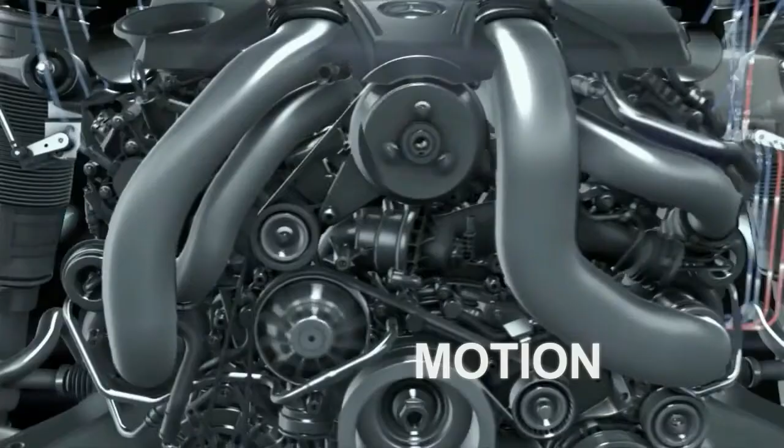Life is motion. Motion is impossible without friction. How can we solve the problems caused by friction? That is the question.

Kragelsky Institute of Tribology presents the most effective and, at this moment, the most universal toolkit for solving the tribological problems of technical progress: the new automated complex of tribological researches, Itrib system.

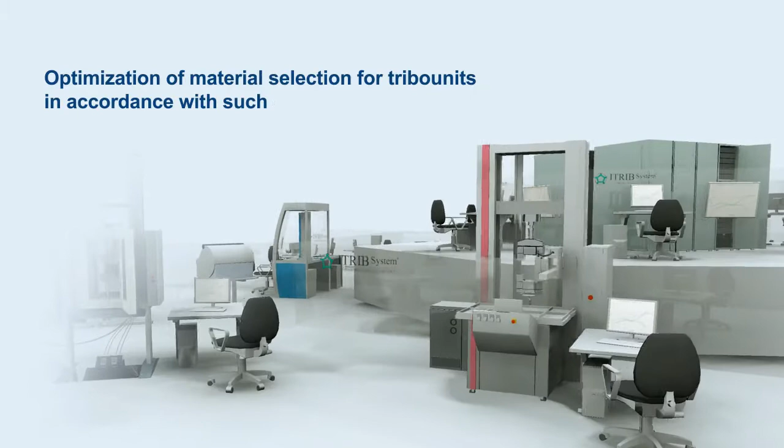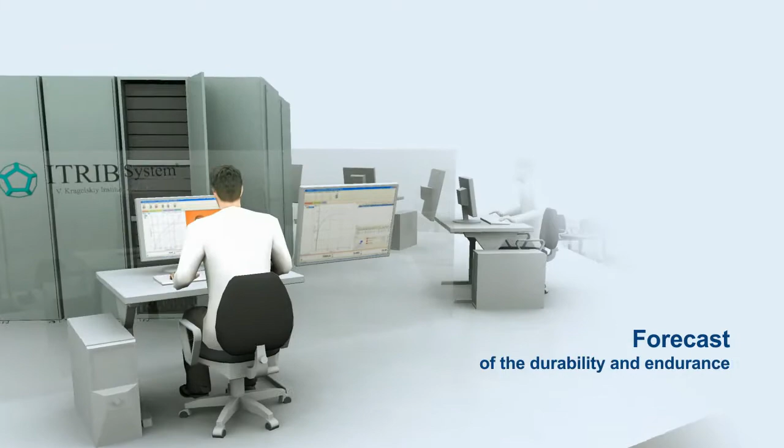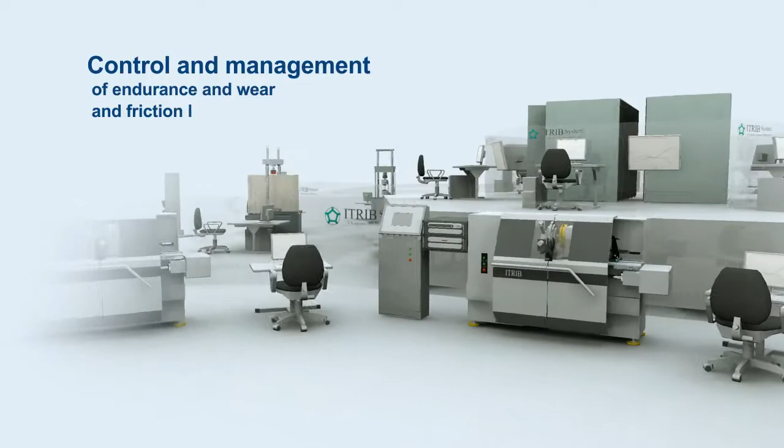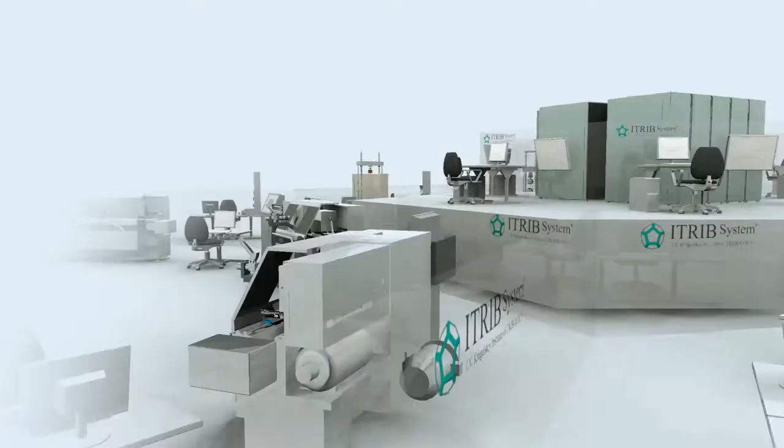Itrib system makes the following possible: optimization of material selection of tribo units in accordance with criteria such as functional purpose and wear resistance of the tribo unit as a whole and of its elements; forecast of the durability and endurance of tribo units; forecast of serviceability and reliability of tribo units; control and management of endurance, wear and friction losses in maintenance; creation of new materials and nanocomposite covers of tribological purpose with set property values; and research of the nature of friction and wear of tribo unit materials.

The complex of tribological researches, Itrib system, is an industrial variant of a new calculation-experimental complex of technical tools and software created for forecasting and controlling friction and wear of frictional knots in tribo systems, and for managing their operational indicators. Itrib system becomes equipment for design and research centers of industrial enterprises, scientific institutions and universities.

Itrib system consists of 5 test modules and the information analytical module.

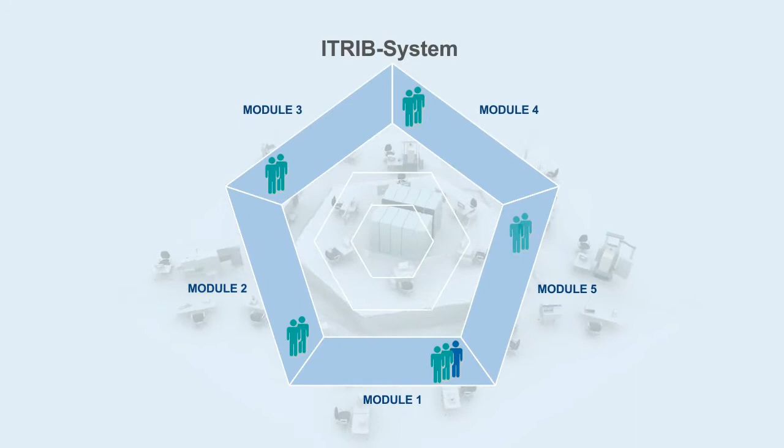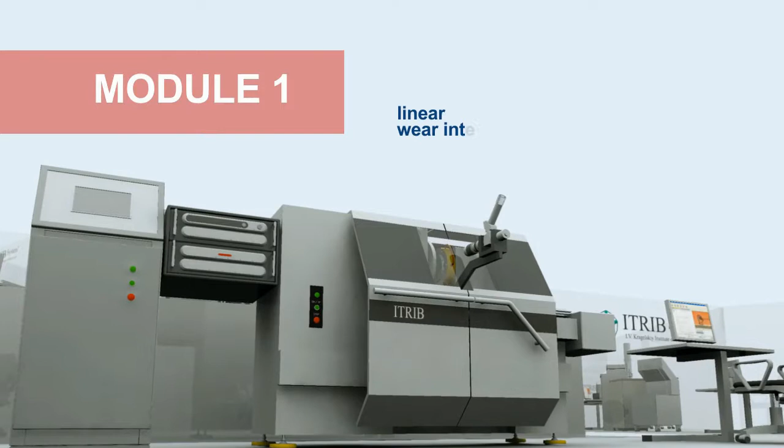Module 1 is focused on tribotechnical tests of friction knots, aiming at obtaining different electrical frictional wear properties of friction couples. For example, friction coefficient, contact electrical resistance, linear wear intensity, and temperature in a friction zone.

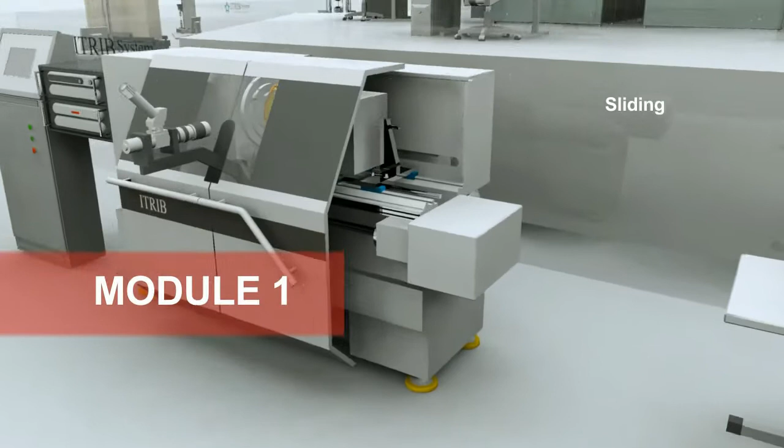In a wide range of electrical frictional interaction modes, it obtains parameters such as sliding speed from 1/1000th to 125 meters per second, mechanical load from 1 to 10,000 Newton, and current from 0 to 500 ampere.

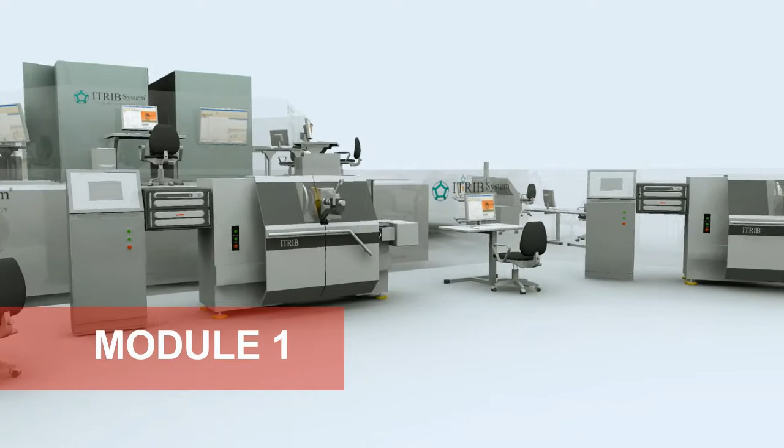Module 1 is equipped with new original tribological testing machines, Itrib Dynamics, with original methods of testing and software. Tribological testing machine Itrib Dynamics can also be used separately with other special methods of testing and software.

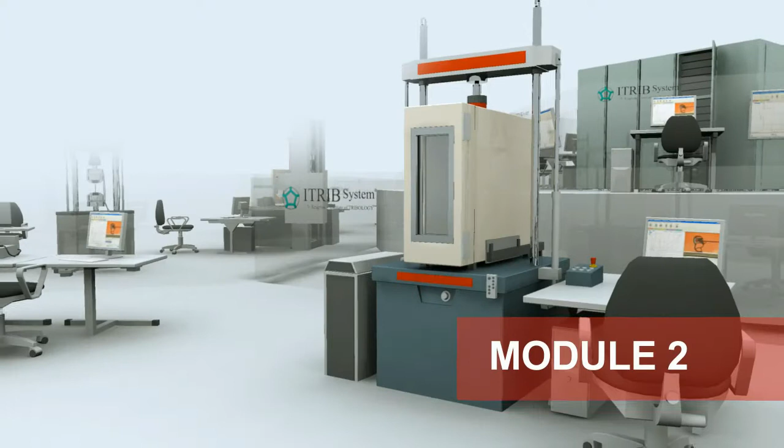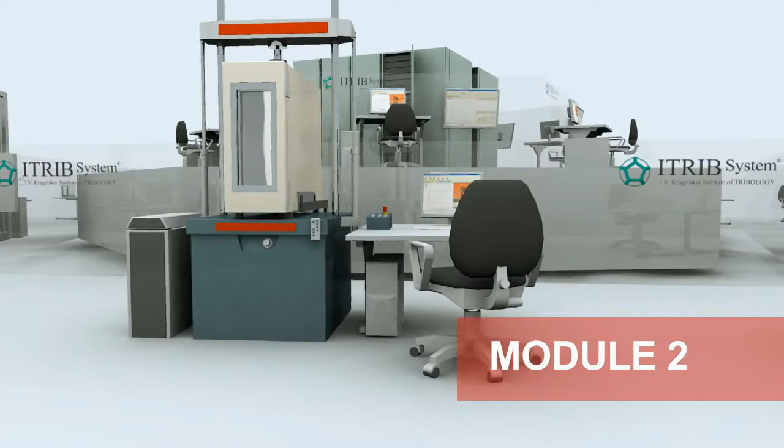Module 2 is focused on testing elastic-plastic parameters of materials as a function of temperature. For example, Rockwell ball hardness, Brinell hardness, plastic hardness, and contact rigidity of the tribo junction. It is equipped with new original universal testing machines, Itrib Contact, with heat chambers, original methods of testing and software.

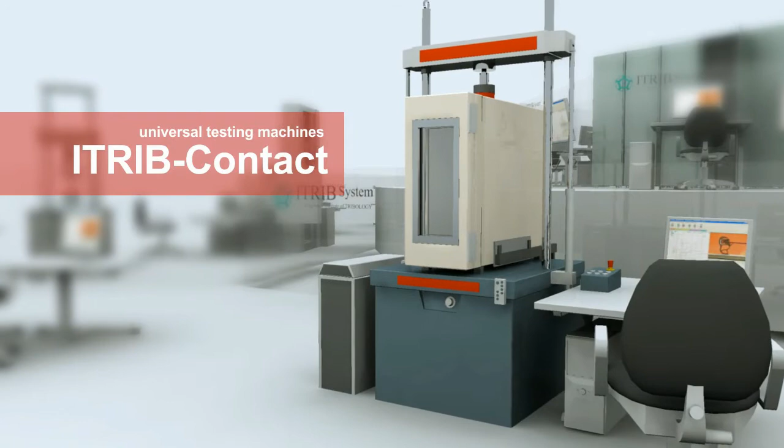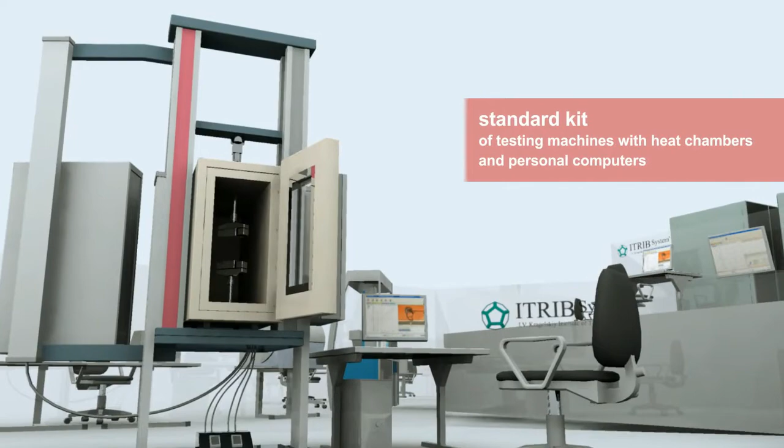Module 3 serves for carrying out tensile and compression tests for ultimate strength and yield strength, to be registered as a function of temperature. It is equipped with a standard kit of testing machines with heat chambers and personal computers.

Module 4 is equipped with standard machinery with a personal computer for researching parameters of roughness of friction surfaces and electrical-physical parameters of materials, with equipment for chemical and structural analysis, and with devices for weight control of the materials being tested.

Module 5 makes it possible to carry out research on thermal parameters of materials as a function of temperature. For example, heat conduction, thermal diffusivity, specific heat, and density. It is equipped with standard machinery with a personal computer.

The information analytical module is the nucleus of the Itrib system complex. It is equipped with a supercomputer. The information from all 5 modules comes here.

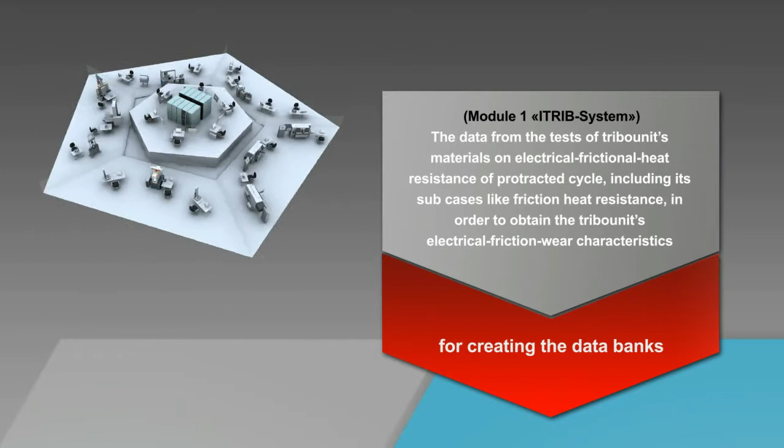From Module 1 comes data from tests of tribo unit materials on electrical frictional heat resistance of protracted cycle, including subcases like friction heat resistance, in order to obtain the tribo unit's electrical friction wear characteristics.

Data from testing the parameters of frictional couple materials come from the other modules for obtaining information on physical-mechanical properties, thermal properties, electrical-physical properties, and geometrical properties of frictional surface quality.

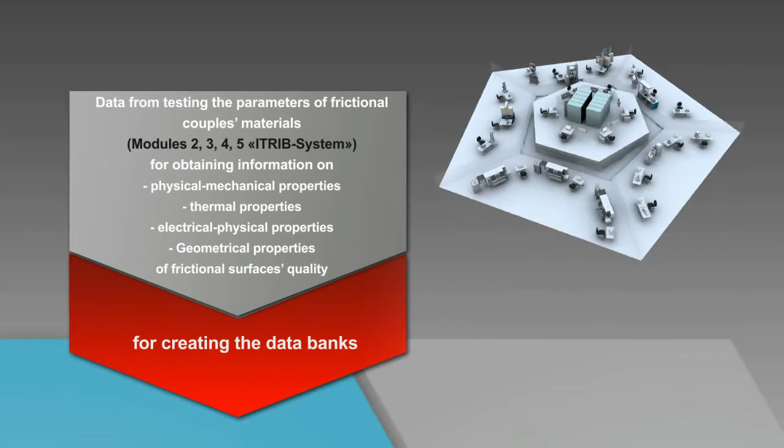Software processes the information from lab testing in modules 1 to 5, creates data banks on material properties, and libraries of electronic tribotechnical information for analytical forecasting of tribotechnical properties of machines' frictional knots, on the basis of generalized thermodynamics of friction and wear of tribo systems.

Software of the information analytical module is elaborated as a system of research and forecasting of operational frictional wear parameters of machines' frictional knots.

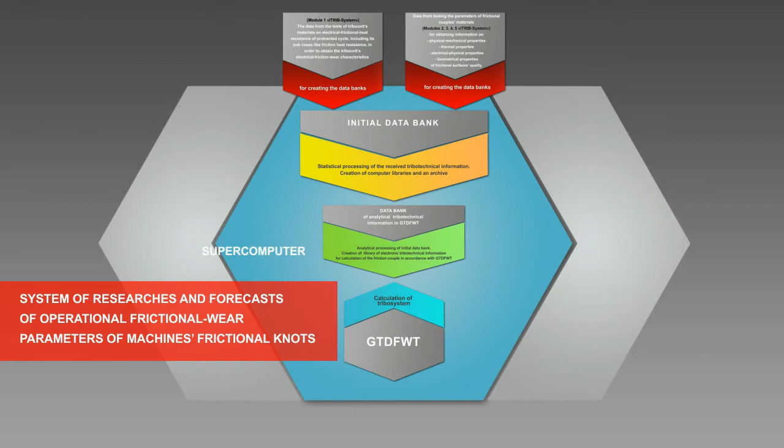Functional capabilities of the system provide for parallel research in 6 directions, in a mode of dialogue between a person and the software of the Itrib system.

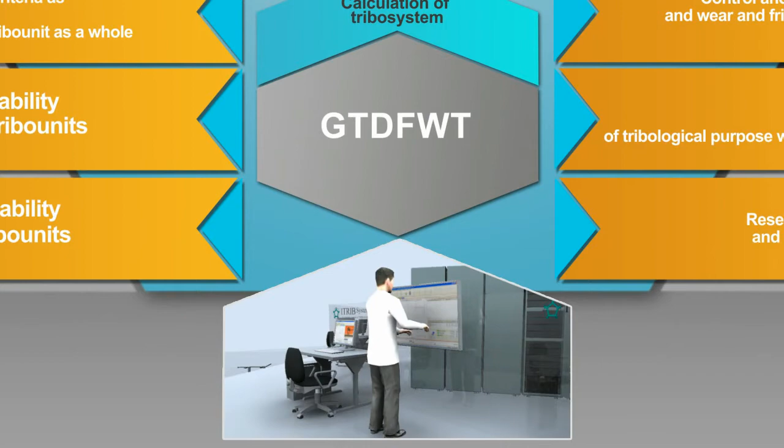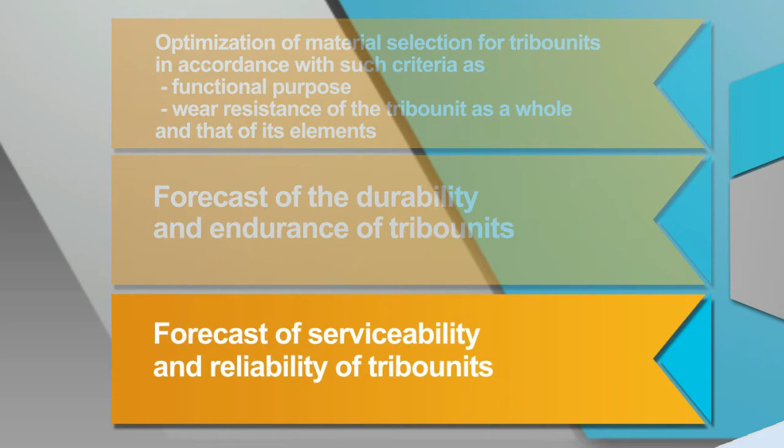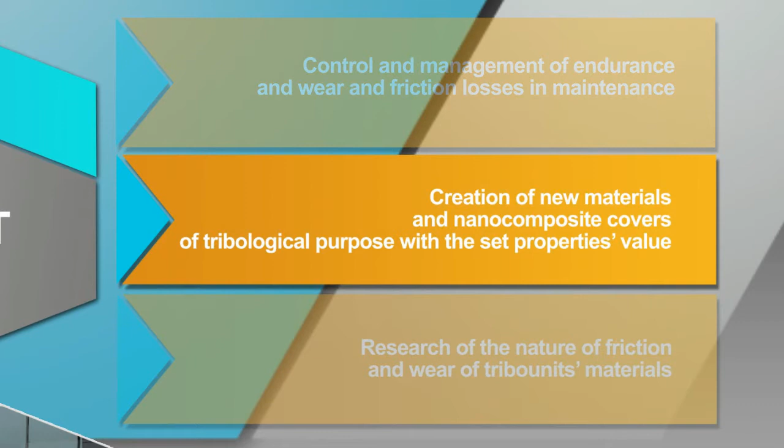These directions are: optimization of material selection of tribo units in accordance with criteria such as functional purpose and wear resistance of the tribo unit as a whole and of its elements; forecast of the durability and endurance of tribo units; forecast of serviceability and reliability of tribo units; control and management of endurance, wear and friction losses in maintenance; creation of new materials and nanocomposite covers of tribological purpose with set property values; and research of the nature of friction and wear of tribo unit materials.

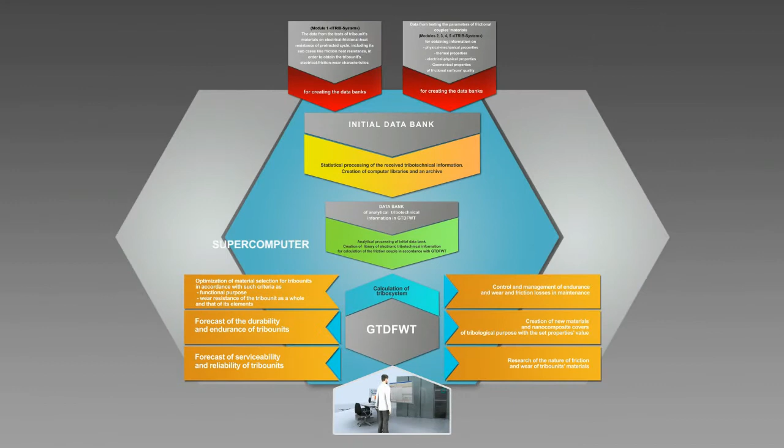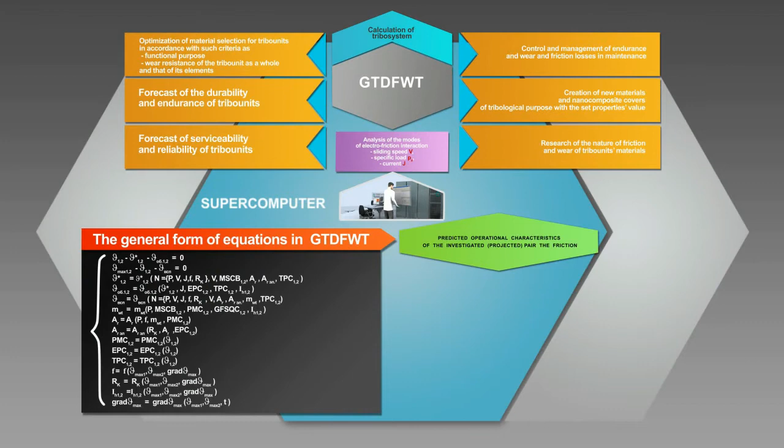The algorithm of calculation of electrical frictional interaction, in accordance with generalized thermodynamics of friction and wear of tribo systems in the software of Itrib system, makes it possible, on the basis of the solution of the generalized thermodynamics set of equations, to obtain general information about operational parameters of a considered friction couple of a real frictional knot for any moment of its work, as a function of friction time.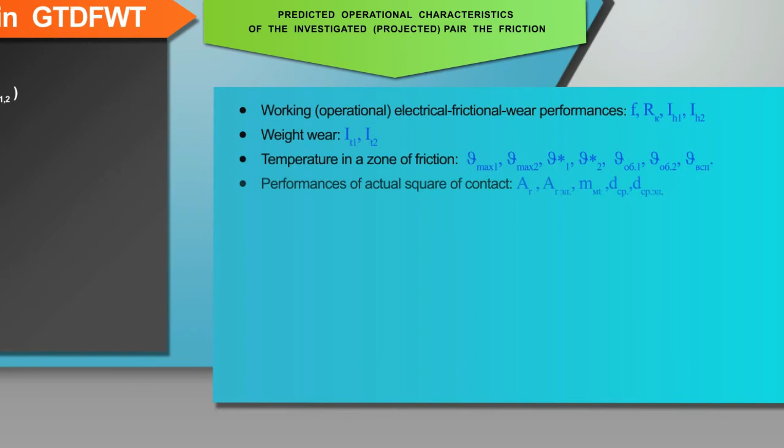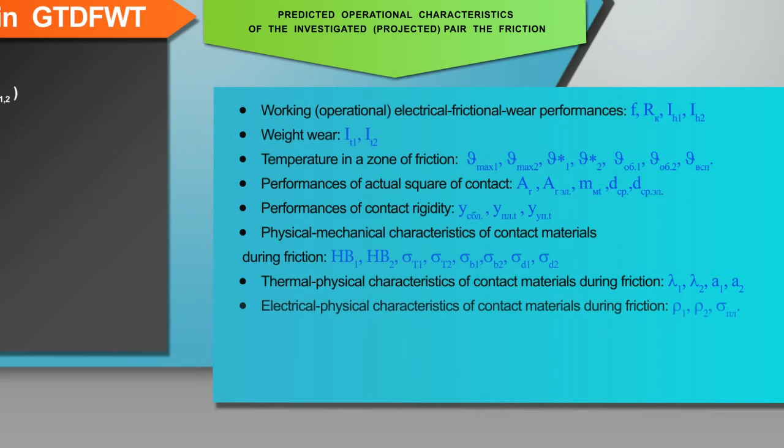This includes working, operational, electrical frictional wear performances: weight wear, temperature in the zone of friction, performances of actual square of contact, performances of contact rigidity, physical-mechanical characteristics of contact materials during friction, thermal physical characteristics of contact materials during friction, and electrical physical characteristics of contact materials during friction.

Of the new automated complex of tribological researches, ITRIB System, at point A of the supercomputer software, a researcher sets one of 6 directions of research.

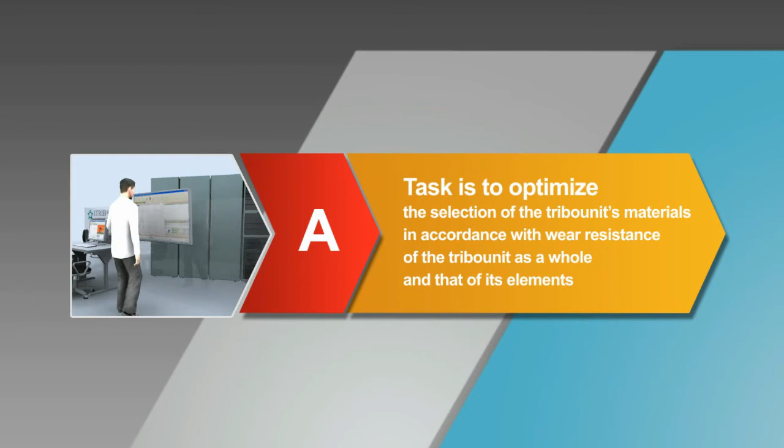For example, at point A, the task is to optimize the selection of tribo unit materials in accordance with wear resistance of the tribo unit as a whole and of its elements.

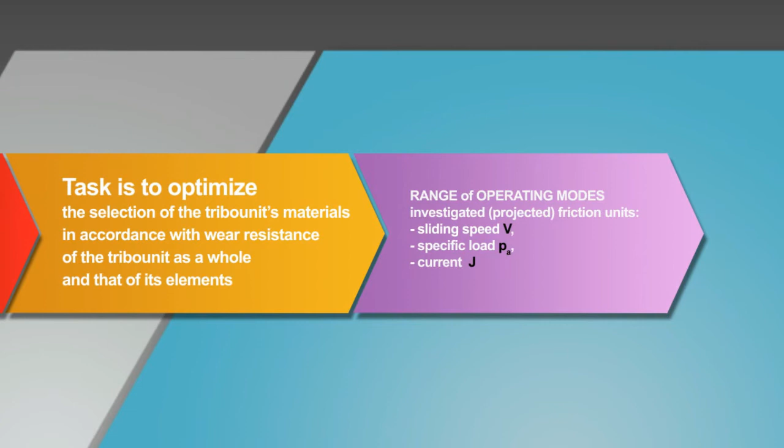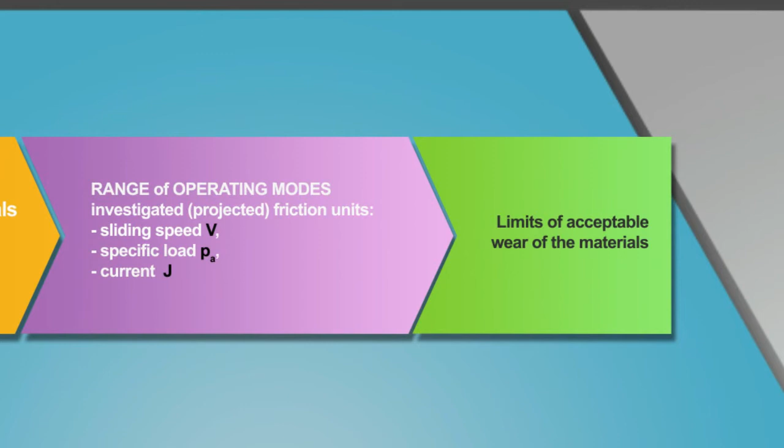The researcher enters the parameters of the working mode of the considered drafted tribo unit, such as sliding speed, specific load, current (if for electrical contacts), and limits of acceptable wear of the materials, then commands the computer to activate the program.

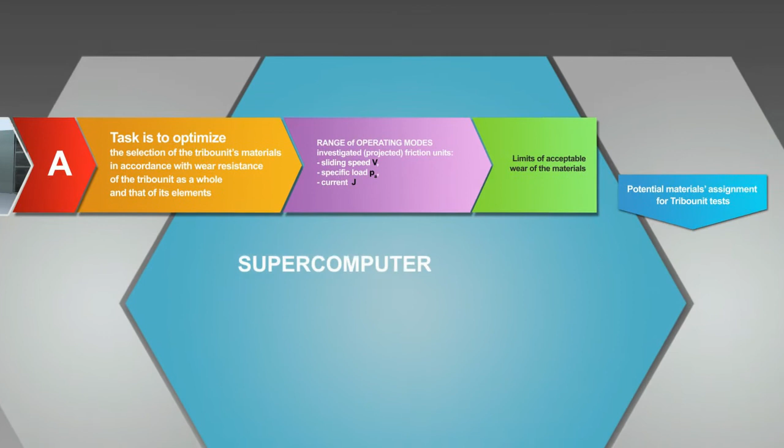Further work is carried out by the computer with its software. It analyzes the library of electronic tribotechnical information, and sets the task for testing modules for additional research in case there is no necessary data in the library.

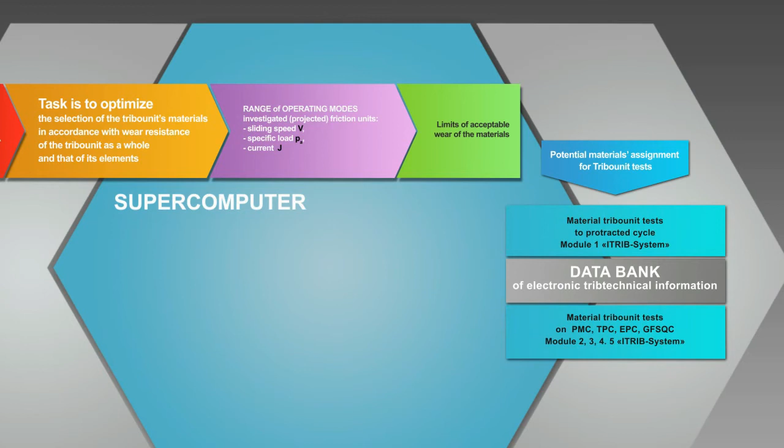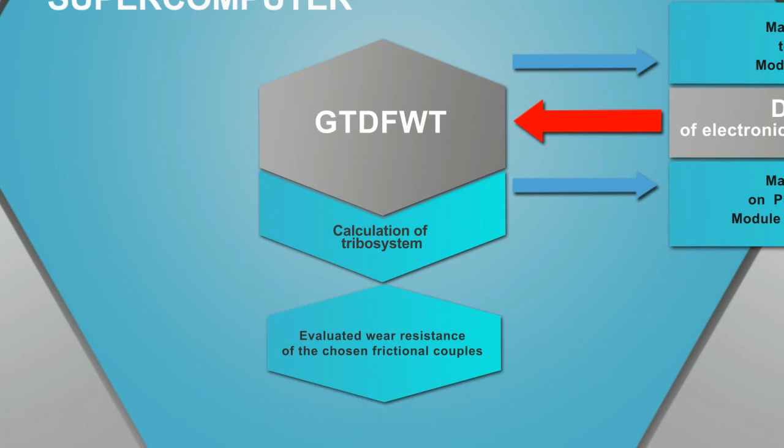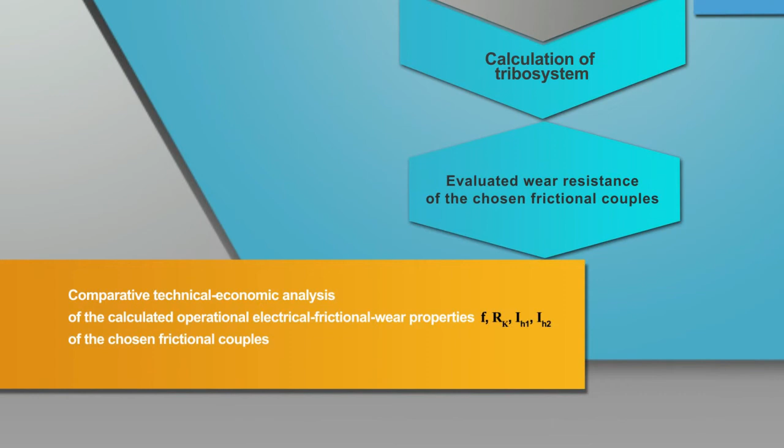It calculates in accordance with generalized thermodynamics of friction and wear of tribo systems, evaluates wear resistance of the chosen frictional couples, and carries out comparative technical-economic analysis of the calculated operational electrical frictional wear properties of the chosen frictional couples.

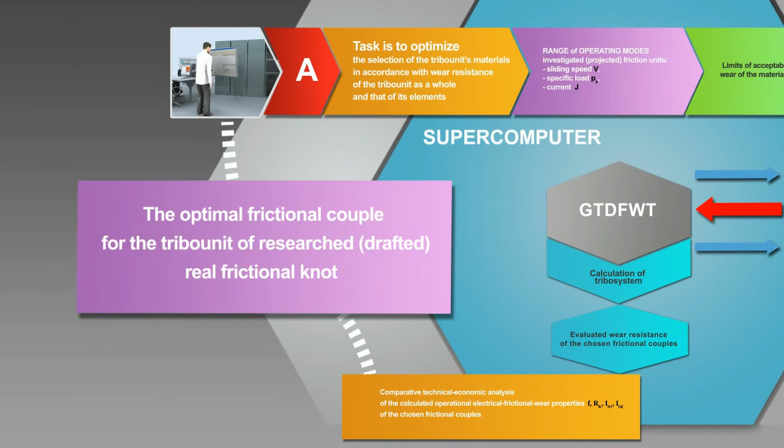It offers the researcher the optimal frictional couple for the tribo unit of the researched, drafted, real frictional knot, or offers modes of task correction in case a solution is not found.

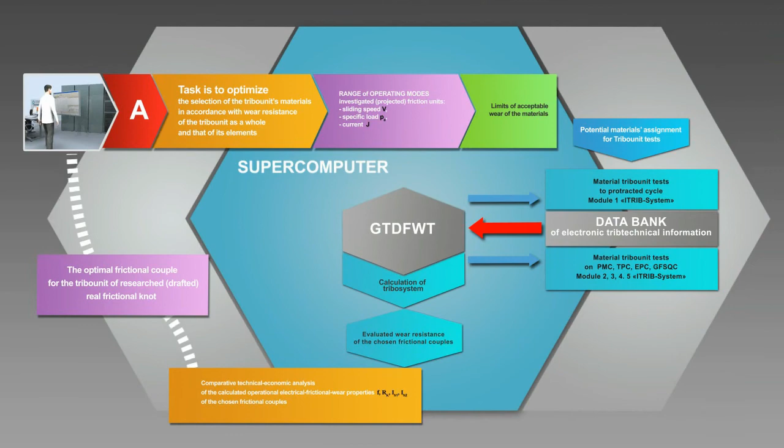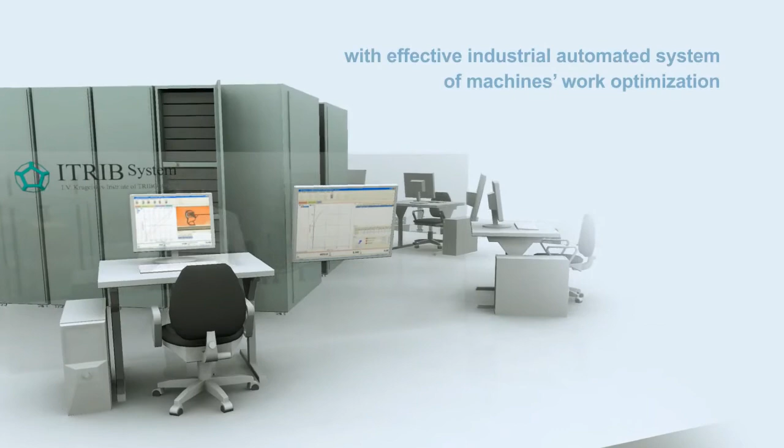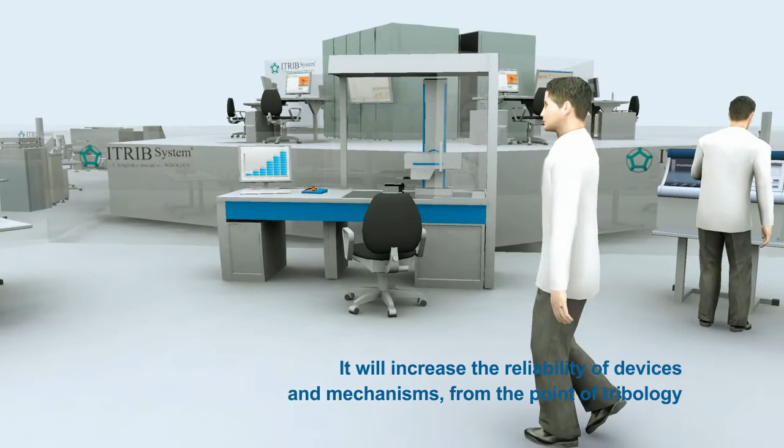Use of this new automated complex of tribological researches, ITRIB System, will provide industrial enterprises, scientific institutions and universities with an effective industrial automated system for machine work optimization, decreasing economic losses from friction. It will increase the reliability of devices and mechanisms from the point of view of tribology, and widen the possibilities of further research into friction and wear, using tribo unit materials as an example.